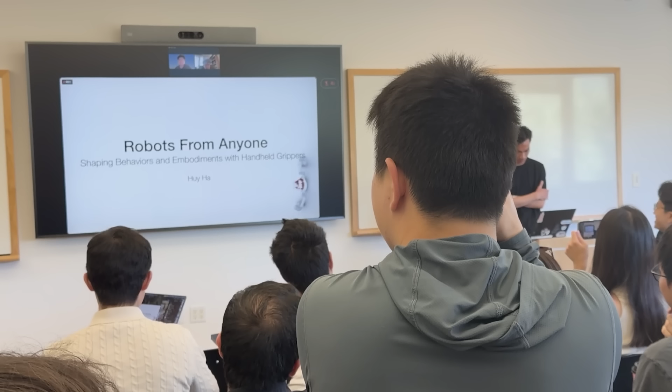Before we start, I just want to say a few things about Huy. So first, I want to talk a little bit about his research. So you can say that Huy always works on things before they get cool, but you can also say that Huy's work is what makes something cool and starts the trend. So for example, he worked on Flingbot before cloth manipulation became a required demo for all the startups. And then he also started working on language-informed robot learning before large language models were popular.

And then recently, he has started working on learning for robot hardware design, and I think we should all pay attention to that. I think whenever Huy is starting something new, we should pay attention to it because that's very likely to be a new trend.

Okay, and then also a little bit about Huy as a person, as a lab member. I think as one of the earliest lab members, Huy really helped to set up the culture in the lab. And many of the young students probably know Huy as the person sitting next to the door, the first person that will greet you when you get into the lab, the person who tells you all the lab policies and rules, and also the person demonstrating how to break them.

And I think most importantly, Huy is always the first person that people come to for help when they need anything, either technical difficulties or personal struggles, or just helping you take your best passport photos. Huy is always there, and we're always very grateful to Huy for setting up the very nice lab culture, and I'm sure the lab will feel different when you graduate successfully. But we'll try our best to carry over the culture. And yes, I guess with that, you can start your thesis defense.

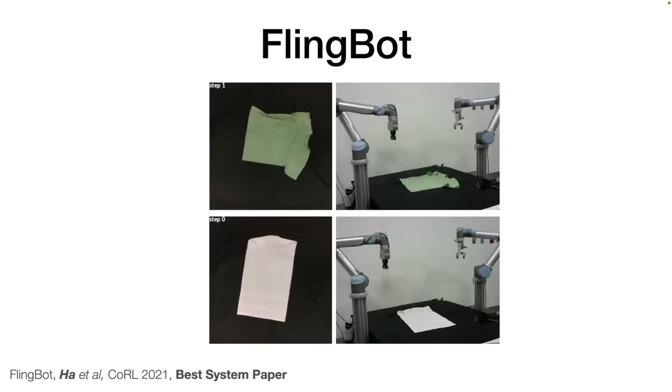Today, I want to start by telling you about everything that I've been doing in the last few years. And I'll start maybe a year before my PhD, when I was an undergrad in Shuran's lab, working on a system called Flingbot. So Flingbot unfolded cloth using dynamic flinging actions with all these nice tricks for self-supervised learning, safe action parameterization, and sim-to-real transfer. Normally, I tell you about how great Flingbot is, but today I want to dunk on it. Not on Flingbot itself, but the entire way of building robots that it represents. See, it's a perfect example of how robots have traditionally been built.

Here, some roboticist picks a task they care about, say, unfolding cloth, but before a single cloth gets unfolded, they have to solve two hard problems. First, the embodiment. What is the best robot for this task? What gripper, what fingers, how big the arms are, how the whole workspace is laid out. And second is the behavior. Once you've committed to a robot, how do you teach the task? What data, what learning signal? Each of these decisions requires a lot of expertise, or in my case, as an undergrad, a lot of trial and error. And here's my problem with it.

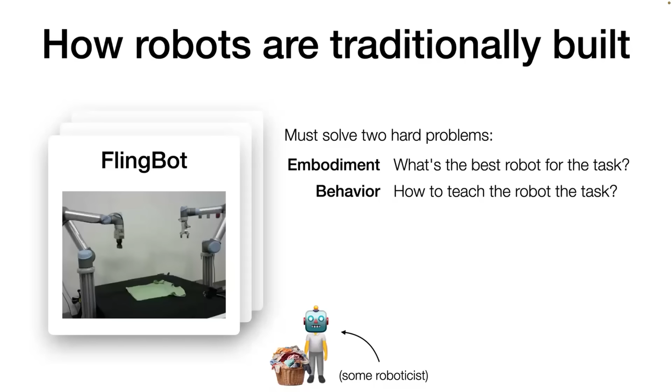One expert does all this work, and what they get out is just one task and one robot in usually one room. And after Flingbot, I became convinced that this just won't scale. There just are not enough experts to cover every task, every robot, in every place that we want robots. And what's actually missing here is data from enough tasks in enough situations, and there's just no way to get that from just a handful of roboticists.

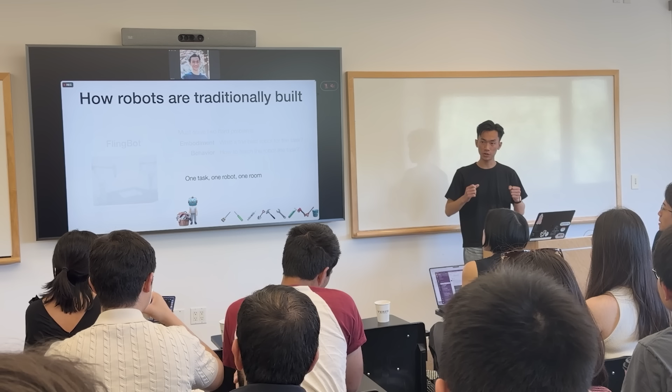So here is my thesis. To get any task on any robot running anywhere, we need to open up robotics to everyone. If we make it easy for anyone to contribute, not just experts, two things happen at once. First, we unlock a whole new level of scale and diversity for real-world robot data, critical for robust and capable robot policies. And second, people become empowered to shape the future of robotics.

And this is because robots that come from this move the way that people do, doing tasks that people care about. And these robots would quite literally be shaped by everyone's hands and therefore reflect the people behind them. And that's what I mean by robots from anyone.

And for that, the two hard problems have to open up to everyone. First, people need to be able to teach robots new behaviors so intuitively that no expertise is required. That's how we reach towards any task anywhere. And that's the first half of today's talk.

And second, people need to also be able to shape the robot's embodiment without being experts either. And this is where we really push the meaning of any robot, to even include robots that don't exist yet. And this will be the second half of the talk.

Remarkably, the same simple thing turns out to be the key to opening up both of these problems: a handheld gripper. And let me explain by talking about a project called UMI.

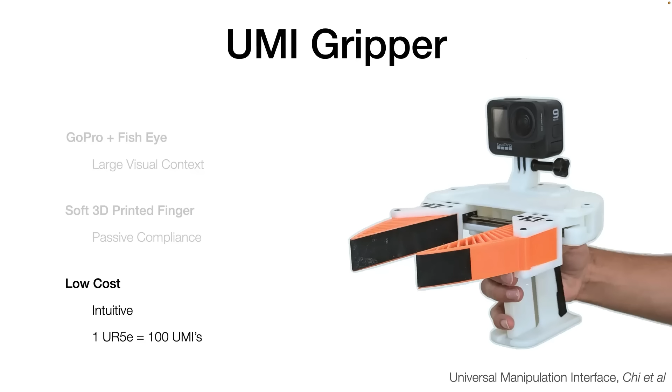For robot observations, UMI has a GoPro with a fisheye adapter that gives a large visual context. For robot actions, UMI has soft 3D printed fingers, which gives passive compliance and helps increase manipulation robustness. And the system is low cost. Since it's so intuitive to use, you can just give it to anyone and they can start using it. And further, for the price of one UR5e, we can build 100 UMIs.

And then using UMI, each entire robot demonstration will be contained in a single MP4 file. And then from that file, we can run visual inertial odometry from the RGB and IMU information to give 6-degree of freedom gripper movements. We can also call our tag tracking functions from the video frames to get gripper commands. So from one MP4 file, we get robot observations and then robot actions.

And from that data, we can train a policy that takes as input images and proprioception information to produce future gripper movements. So the entire pipeline will look like this. We'll collect a few hundred demonstrations with UMI, all without the robot, as you can see on the left, and then we'll train a diffusion policy and then deploy it on the right. And this pipeline will work even for dynamic tasks like tossing.

But there's one caveat. See, the gripper movements require a precise position controller, one capable of tracking robustly even under fast trajectories. And such precise position controllers can be engineered for fixed-base arms, like the UR5. But what about legged robots?

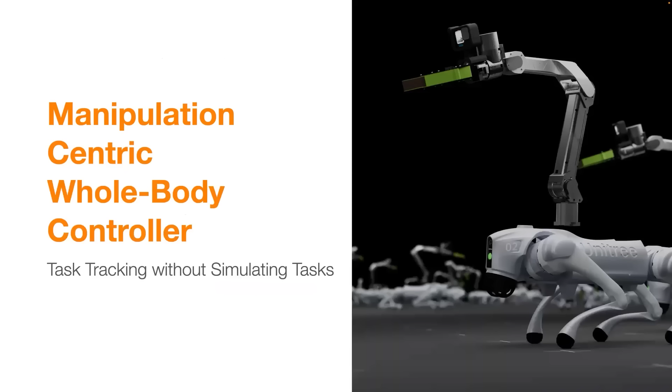So that's where the second part comes in, where we train a manipulation-centric whole-body controller for task tracking without simulating any tasks. So what does this thing do? Well, it should take as input end effector target poses, and then output robot-specific body commands in order to reach those end effector poses. So in the case of my quadruped system, it should output 18 scalars, 3 for each leg, and then 6 for the arm.

And so if this is the interface to our whole body controller, you'll notice that it slots right in place into our UMI pipeline to act as the position controller that we need. So what do we actually want out of this whole body controller? Well, to start, the controller should have a formulation that is compatible with UMI, in that it should not depend on any robot-specific body commands like velocity commands, taking as input only end effector targets.

They should also track precisely, even for dynamic targets, just like the engineered controllers for fixed-base arms. And then lastly, they should be stable, in that the end effector should be stable regardless of the body movements. This means that the controller should try its best to isolate these body movements from the gripper movements. And the quadruped field actually has a term for this kind of stability. They call it chicken head stability for pretty obvious reasons. So for the rest of the talk, when I say stability, this is what I mean, chicken head stability.

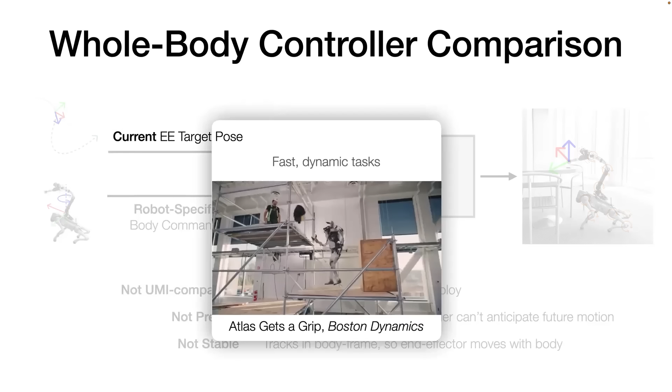So what do prior works do? Well, they typically share the 3 following design choices. First, they take as input robot-specific body commands, like the velocity body command, so that's not UMI compatible. Next, the prior works represent the target as a single target pose, which might work for slow quasi-static tasks, like the ones that prior works have shown. But this is not enough for dynamic tasks, because in order to execute dynamic tasks, legged robots take time to build up the right momentum, just like humans do.

So, for instance, in this Boston Dynamics video, notice how Atlas needs to bend down and coil a little bit to the left before tossing to the right. And intuitively, the controller just needs a preview of what motion is coming up in the near future to have this kind of anticipatory behavior. So we might be able to address this by giving it more than just a current target, maybe a trajectory of target poses.

And then lastly, the prior works' controllers aren't stable. First, they track in the body frame. So this means that the end effector will follow body movements. But since the arms have long links, they typically act to amplify tiny shakes in the body. So notice how with each little step here, a little shake in the body causes a large shake in the arm. But instead, what we want is world frame tracking, controllers that compensate body movements.

To really drive this point home of why this is important for policy deployment, let's walk through an example. Imagine that the robot is trying to put the cup down into the saucer, but it's being pulled backwards. What a body frame controller would do is to try to keep its target constant in the body frame. So as the body's pulled back, the end effector follows. This means that the controller will now depend on the much lower rate reacting manipulation policy to perform this correction.

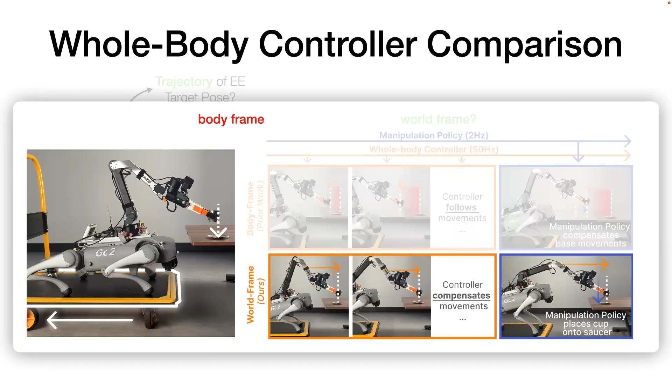Meanwhile, a world frame controller would keep its target constant in the world frame. The gripper stays while the body moves. It would compensate the body movement. So we might want to rethink this body frame formulation.

In addition, they only track slow trajectories, which are much easier than fast ones. So this means the controller doesn't really need to learn the necessary body coordination skills to achieve high velocity motion. And then asking it to perform these kind of motions at test time would be out of distribution and then lead to dangerous states. And it turns out that this whole body controller formulation is shared across most prior works. As you can see here, a system from CMU, one from UCSD, and one from MIT.

And so to address these, we took out robot-specific body commands, making it UMI compatible. We got predictability by giving the controller a trajectory of targets as input, allowing it to anticipate future motion. And then finally, instead of training on slow trajectories in the body frame, we train it with manipulation trajectories recorded from UMI in the world frame, which could include some fast motions like tossing that are task relevant. And what we get out is a manipulation-centric whole body controller.

So together, the pipeline looks like this. We'll have images coming into the visuomotor policy, which outputs end effector movements. This part is trained using behavior cloning on real-world data. And then the end effector trajectories are then fed into the whole body controller, which is trained using reinforcement learning entirely in simulation. So remember the goal of getting any task, any robot, anywhere? Let's see how the UMI on Legs pipeline takes us closer towards this vision.

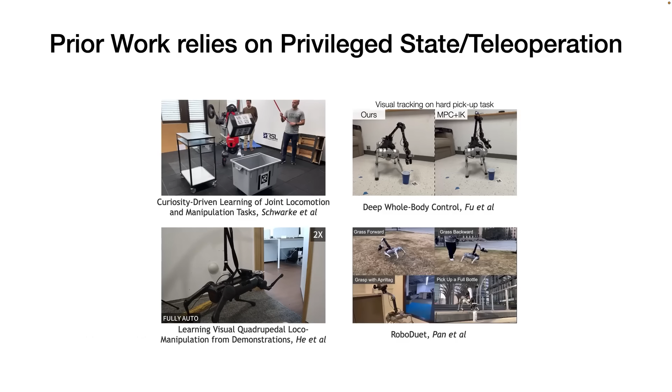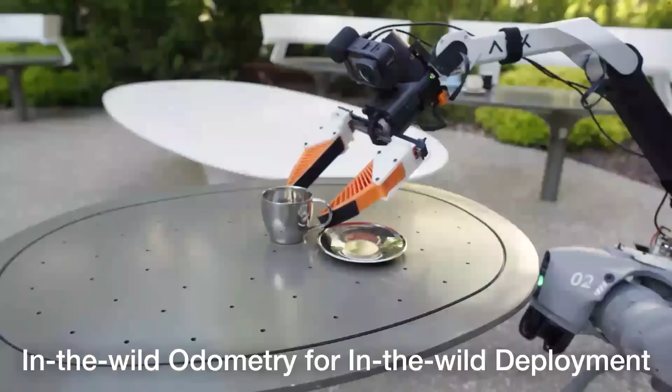However, when we looked at existing systems, we found that many of them used privileged states in the form of ArUco tags. And most outdoor manipulation examples are actually not fully autonomous. So to our surprise, it seems like the lack of in-the-wild real-time odometry has ironically constrained many legged systems in the lab. In contrast, here is the UMI on Legs system. No wires, no ArUco tags, running at 1x speed out in the wild, fully autonomous, doing its cup rearrangement task.

So how do we do it? Well, we use an iPhone mounted to the butt of the dog, and then we implemented a custom iOS app that publishes the iPhone's pose to the robot at 60 hertz. And because it's tuned very well by Apple, it runs real time and works anywhere. So with this last missing component, we finally get stabilization. Whether it's moving back and forth, side to side, up and down, it just stabilizes.

We design experiments to evaluate the capability, robustness, and UMI compatibility of our formulation. Diving into the first one, we ask, is our system capable of really hard skills? Can it do more than just pick and place? So what's a really hard skill? Here is a really hard skill, tossing. It is so challenging that it's only been done once before on quadrupeds by Boston Dynamics.

So how did Boston Dynamics pull this off? Well, they typically use offline trajectory optimization in order to find a tossing motion that could toss as far away as possible. And by all means, this is really hard. Getting any tossing behavior in quadrupeds is really hard, but let me compare this to our setting.

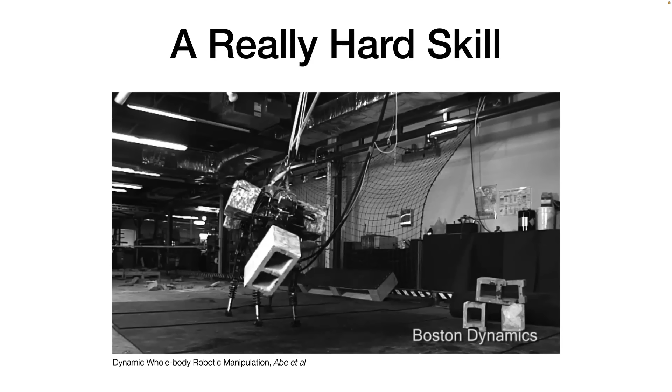See, first, our setting is more unstructured. We have to track unseen trajectories coming from a diffusion policy with no explicit assumptions on the object model. So our controller has to track online instead of pre-computing some trajectory offline for known objects. And second, our task has a narrower set of goal states, since we're not just trying to toss as far away as possible, but instead towards a specific target.

So we'll go ahead with tossing. We'll collect some demonstrations using UMI in the real world, and then we'll use those trajectories to train our whole body controller in simulation. Okay, it works in simulation. What could possibly go wrong in the real world? Sometimes I still ask myself the same question as I look through weeks and weeks of sim-to-real debugging footage, because whatever we did, the robot would just shake.

And this video here is my favorite because not only can you hear the violent vibration when sim-to-real is incorrect, but you'll also be able to see that my lab-mate Zilly is just doing her thing in the back. This goes to show how normal this is during our sim-to-real stage. It's just, oh, it's a violent vibration. And one of the reasons why it took so long was because we found it so hard to diagnose the issue. Whatever went wrong, the robot would just shake. Debugging this took us quite a while.

But let me show you what reducing the sim-to-real gap looks like so that next time you can reply to your advisor something more intelligent than saying it's just shaking. So you can tell her, oh, it's because of the pose estimation latency of the odometry. So you do a slow motion smack test to see exactly what that latency is. After we did this, we simulated pose latency during training. Or you can say, oh, it's the joint frictions, they're wrong. So you flip the dog upside down to do some system identification.

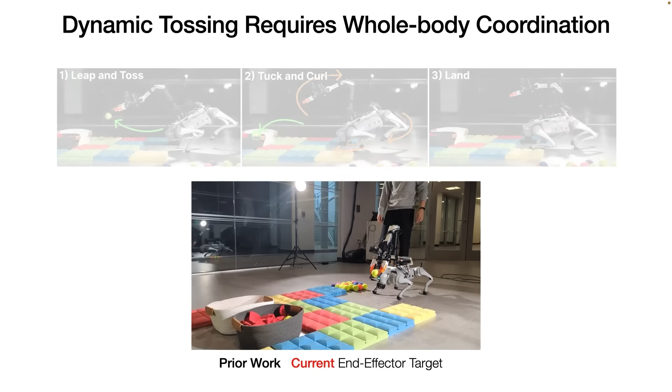The strategy here is a leap and a toss, and then a curl and a land. The upshot here is this: using a trajectory interface like we do allows the whole body controller to anticipate future motion and track more precisely and safely, even for dynamic trajectories. So is our system capable of really hard skills? Thanks to our whole body controller design and sim-to-real efforts, I think so.

Moving on to robustness, we wanted to see if our whole body controller can handle unexpected external perturbations. So we've designed this pushing task to test robustness, because our controller was trained in simulation with no objects ever resisting its motion. But to help bridge this gap, we've included domain randomization on mass and center of mass along the body, as well as along the arm and the gripper. It turns out that this was enough to get this task to run.

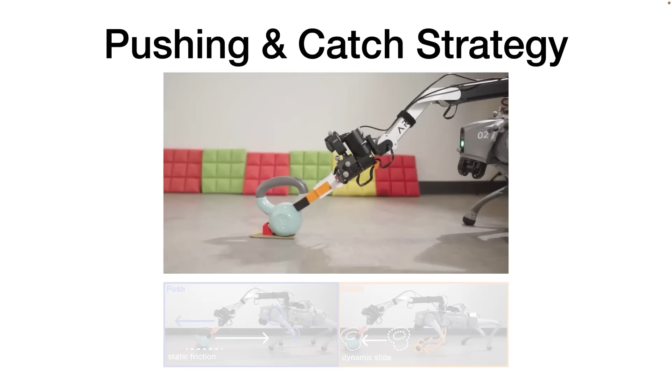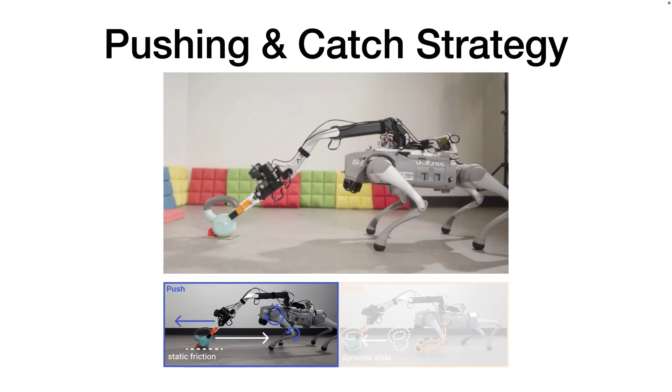What the policy has learned to perform this task is a strategy I call push and catch. So in the pushing phase, this robot will try and build up more and more power in its body as it fights the static friction of the weight on the ground. So it will keep pushing until this power builds up and the static friction breaks into a dynamic slide, at which point the robot will catch itself. And then this strategy will repeat until the robot pushes the kettlebell towards the goal.

Quantitatively, we saw a 90% success rate for fully autonomous pushing. And when we tried the 20-pound kettlebell, we noticed that the hardware experiences shutdowns frequently due to overheating and overcurrent. So we switched to a tethered setup with external power, and then we managed to run 5 trials. The external power is all these noodles that you see in the back. So can our controller handle unexpected external perturbations? Yeah, I think so, thanks to domain randomization, but we probably need better robots with better batteries.

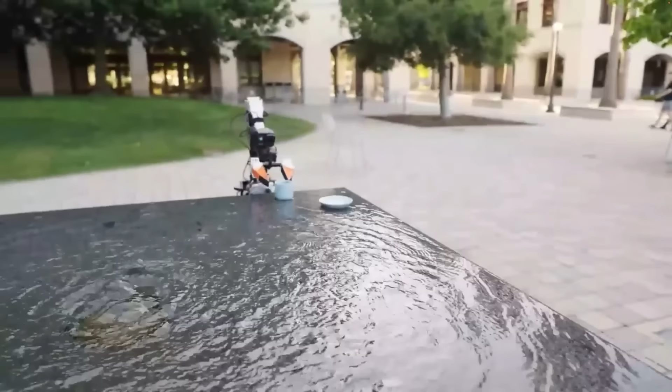And finally, my favorite experiment, UMI compatibility, where we ask: can we plug and play existing UMI policies onto UMI on Legs? So for this cup rearrangement task, we're supposed to push the cup to rotate it and then put the cup down onto the saucer. And we took this publicly available checkpoint from the UMI repo, developed entirely separately from our quadruped platform. We put it on our quadruped, and this is what we got. We put our system on a water fountain it's never seen before on campus, on a shaky collapsible table, and then asked it to perform this cup rearrangement task out in the wild, all unseen.

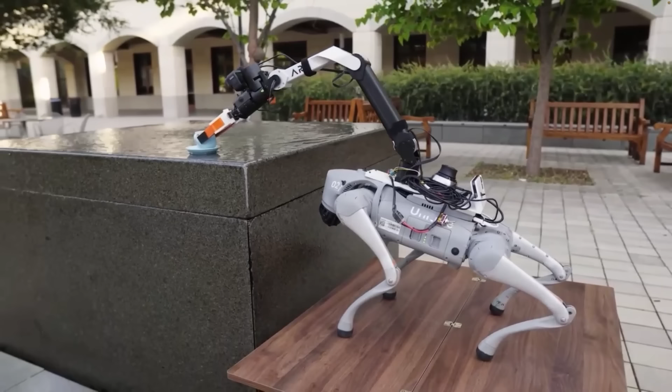We evaluated the system on 4 different cups in 5 different locations on campus and reported a 60% success rate. And comparing this in-the-wild evaluation with an in-lab evaluation, we noticed a 20% gap. We also compared our iPhone-based odometry with the Oracle odometry and saw that there was another 5% gap between the iPhone-based odometry and the Oracle motion capture-based odometry. But you'll notice that even without perfectly stable odometry, our controller remains pretty stable, as you can see here in how it reacts to perturbations during deployment.

So this is the entire pipeline running, UMI outputting actions, and then the controller tracking it. And as it's running, you can come along and just pick up the robot. You can really mess with it, push its leg, come along, smack the gripper, and it will stay stable. Chicken head stable.

But if you're going to remember one thing from UMI on Legs, I hope it's that we can do this at all. Before UMI on Legs, nobody has ever been able to reuse the same policy for a fixed-base arm on a quadruped and then run it anywhere. And this is the first step towards any task, any robot, anywhere. We're doing some really hard tasks, ones that are really finicky to teleoperate a robot for, and we're using the same policy on unseen robots in unseen environments. That said, that's just the first step, and we've still got some ways to go.

Notice here how the exact same UMI checkpoint has different performance between different embodiments. When we dug into it further, we verified it in simulation too. Sadly, not all embodiments are equally UMI-able. For instance, we saw that fixed-base arms like the UR10e closely match the performance of an Oracle embodiment, but the performance is much worse for aerial drones.

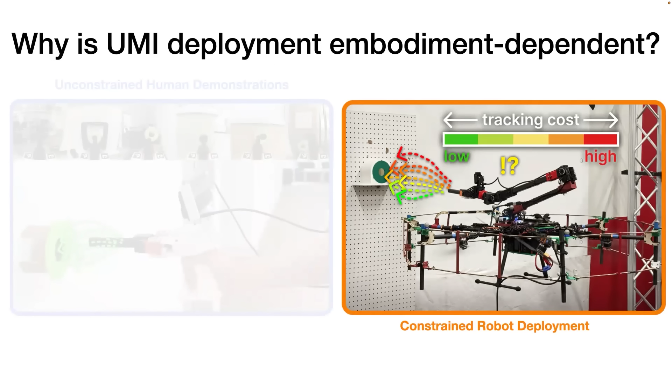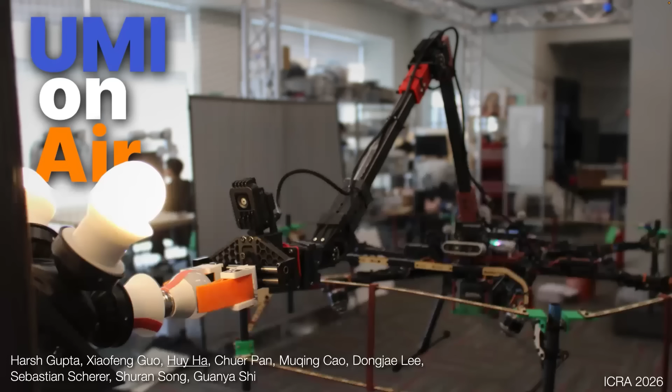So we asked, what if we guided the policy to output actions that are easier to track for a given embodiment? Let me tell you how we implemented this guidance in a project called UMI on Air. So like before, we're going to take in our observations along with noisy actions to iteratively generate the denoised actions. The actions are then tracked by an embodiment-specific controller. Notice, though, that the controllers usually give a tracking cost, which tells you how well the trajectory can be tracked.

You can take the gradient of this cost with respect to the action and then incorporate them into the diffusion process using diffusion guidance. Essentially, the gradient is asking, how could the trajectory be changed to give a lower tracking cost? And then nudge the diffusion samples towards those better trajectories. And this will work for different controllers too. You can just swap out different controllers and embodiments, and then you reuse the same policy.

And we call this method embodiment-aware diffusion. This is because even though the UMI policy remains embodiment agnostic, its deployment is now embodiment aware. Because UMI on Legs only supported one-way communication from the policy to the controller. UMI on Air closes this loop with two-way communication using diffusion guidance. And in doing so, it makes all embodiments more UMI-able.

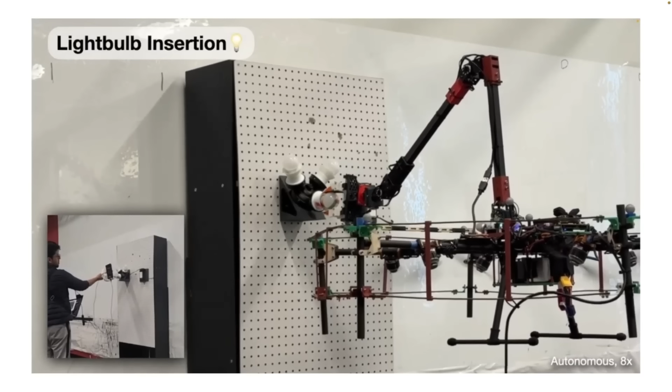But what I really want you to remember from this project is how it enabled collaboration. Because if we only make it easier for anyone to collect their data, we'll have many, many small datasets. However, if we make it easier for anyone to collaborate with anyone else, we'll all have one shared dataset and we can build a community around it. Let me illustrate. In UMI on Air, our Stanford and CMU team can collaborate from across the country without ever seeing each other. In fact, I just met the first author yesterday.

For the light bulb insertion task, I actually collected all the UMI data here at Stanford. I just spent some time in an afternoon walking around Stanford to collect this data. And then that policy was directly deployed on a drone at CMU in Pittsburgh. The best part is, I still have never seen the robot. I don't even know if I ever will, but maybe that's the point.

The magic of the UMI approach is that people can collaborate and contribute. Doesn't matter what skills you have, where you are, whether you even have a robot or not. UMI makes robotics more accessible to everyone. And I think that's why UMI is taking off. To further facilitate collaborations beyond our own lab, I started this initiative called UMI Data, aimed to include all UMI-like datasets. And I've been truly blown away by how many people all around the world have embraced UMI.

In 12 months alone, the UMI community dataset has grown by 900,000 demonstrations. For comparison, in the same time frame, the DROID dataset has grown by 0 demos. This stark contrast reveals a core insight. It's that UMI datasets are not static artifacts. They are as dynamic and lively as the community that supports it.

So let me take a step back. For the two hard problems that we started with, behaviors and embodiments, the first half of the talk has been about the first one, behavior. The handheld gripper that made teaching robots so intuitive that anyone can collect robot data out in the wild. No robot, no expertise required.

We've deployed the resulting UMI policies on legs, on air, and even underwater. This is our policy controlling this drone out in the ocean, a completely unseen environment. And although we can't dive into UMI underwater today, I hope it further convinces you that we've made real progress towards behaviors for any tasks that run on any robot anywhere.

However, as we've seen, running on any robot doesn't mean performing optimally on any robot. With embodiment guidance, we've narrowed the gap, but there will always be some difference in performance between different embodiments. Because you can keep trying to make robots smarter with bigger data sets, better algorithms, or more capable policy architectures, but if you think about it, it's the robot's embodiment that enables or constrains what tasks the robot can perform well. For instance, you can collect as much tossing data as you want, but if your robot's embodiment is far from optimal, well, it might toss itself too.

So this brings us to the second half of today's talk. Here, we also need to open up the second hard problem to everyone. We want to make sure that anyone could generate robot embodiments for tasks that they care about without being experts. So let's frame this problem more concretely. Given as input a target end effector motion from some task demonstration and some reward function, our goal is to generate complete robot embodiments for the task that achieve high reward. And here by complete, I mean everything including geometry, kinematics, inertial properties, as well as how it moves with a controller. We call this problem motion-conditioned robot co-design.

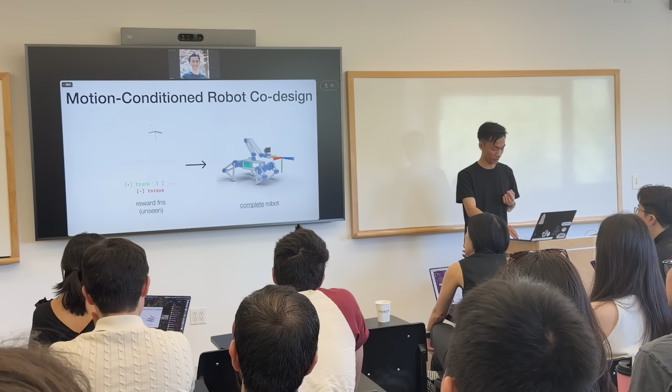And for the second half of today's talk, I want to tell you about our attempt at tackling this problem in one unified framework called transformer-transformer. It has 3 parts, and you have until part 2 to figure out the pun in the name yourself. So with that, let's dive into part 1, a unified robot representation. Now, if we want a model to co-design any robot, the network needs a common language that spans across diverse robots' embodiments. So we create robot tokens, a unified robot representation. We call it unified because we've designed it to tokenize any robot, giving tokens that can be used as inputs or outputs from the model.

So given a robot like this quadruped manipulator, we parse all of its embodiment attributes into a few token types, including links, joints, and motors. We also include the robot state from the motor, links, joints, as well as the actions. So we have robot embodiment tokens and then robot dynamic tokens. This means that robot token is complete. It includes all the information about a robot's embodiments and dynamics. Robot token is also flexible. It can handle arbitrary degrees of freedom and connectivity using token IDs. Here, the tokens use IDs to point to each other so that joints, for instance, know which two links they connect.

And then robot token is also consistent. The tokenizer does a lot of pre-processing to reduce all this redundancy by storing inertial and transform data in a consistent frame. And the upshot of all this is that our tokenizer can turn any robot into a sequence of embodiment and dynamic tokens, whether it's a biped with complex linkages, a dexterous hand, or even a full-blown humanoid. Now the question is, what can we do with these tokens?

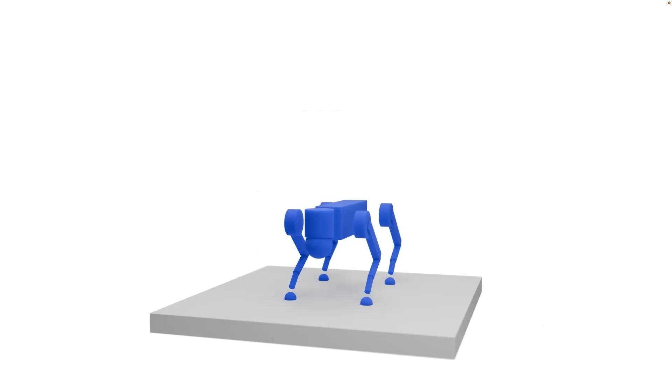And since this whole process is stochastic, if you run it again, you'll get different robots each time. If you train on different robots, here we tried training on different robots from MuJoCo Menagerie, and then found that in a single transformer, you can diffuse out diverse robots, from fixed-base arms to quadrupeds to humanoids to dexterous hands. I bet you never saw a diffusion process on robots before, right?

Our model can also wear other hats. It's also a cross-embodiment controller. It takes as input the target trajectory and the current robot states to diffuse out robot actions. We call this control policy embodiment aware because it is given the complete embodiment information. This means that when you run the policy on a robot with, say, different inertia, a smaller joint range, or different motor gains, the policy will be able to adjust its control strategy accordingly because it is conditioned on the complete robot embodiment.

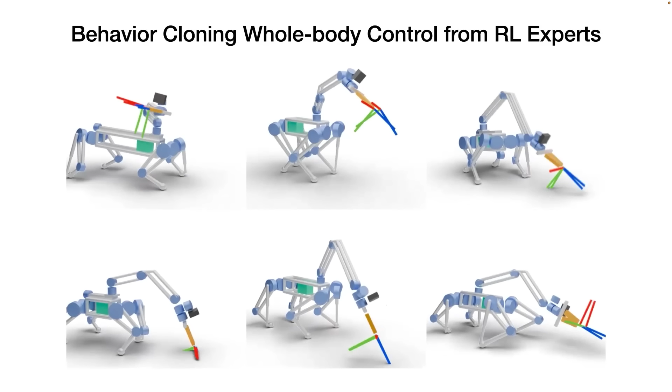And this is why when you run it on different quadrupeds with different knee directions or different torso length, it will just adjust its control strategy accordingly. So with all of these different functionalities under one model, we can now go back to the first question and ask, what is the best robot embodiment for a given manipulation task? Another way of phrasing this question is, conditioned on the manipulation task, could we generate robot embodiments that achieve high reward?

This brings us to the third part of transformer-transformer, dynamics self-guidance, a unified dynamics training objective. And here we call the training objective unified because it prepares the model to zero-shot optimize unseen rewards at inference time. Let's see how. Given as input a target motion trajectory and some reward function to optimize, the model must output an optimized embodiment. The key challenge here is how can we generate high reward embodiments, especially since our model was never trained on any rewards.

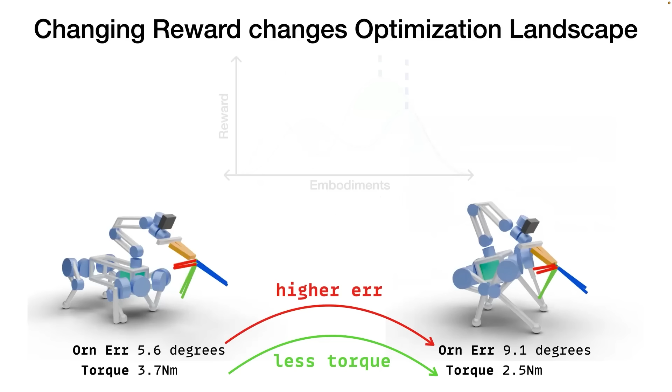And for the same trajectory, we can also ask the model to optimize more reward terms, such as also minimizing the torque. And this made the robot smaller and therefore lighter, while still being able to do the task. Adding this extra term reduced the average torque usage by 32%. See, by adding another reward term, we're changing the optimization landscape. This also changed the best robot for the task, because now the model must balance between these two trade-offs, sacrificing maybe a little bit of tracking performance to use a little bit less torque.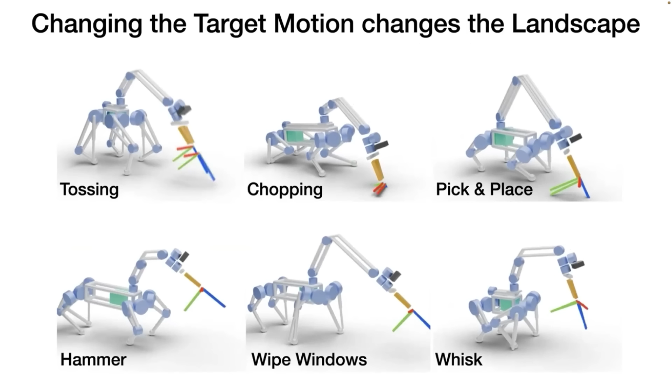And the model is able to make this trade-off, demonstrating that you're able to train on embodiment dynamics modeling to optimize for unseen rewards. In other words, the model can zero-shot optimize rewards. So changing the reward changes the landscape. But changing out the target motion also changes the landscape. Here, when we conditioned on different trajectories, we indeed see that the model produces different robots, each specialized for the single motion that it was conditioned on. But wait, let's take a step back. We actually don't want to optimize robots for just one motion.

We actually want to optimize the robots for manipulation tasks that are much better captured by a distribution of motions. So how could we do this? And it turns out that we can directly tackle this by composing diffusion models. At the high level, if we have one model optimizing for tossing and another optimizing for chopping, we could get a model optimized for both tossing and chopping by adding the diffusion predictions together.

So to test this, we took the bimanual dishwashing UMI dataset and fed 26 validation trajectories into Transformer. The model then generates robots that are optimized for all the trajectories that we gave it, helping us navigate the large design space of both discrete choices like different spine designs, as well as continuous choices like arm dimensions.

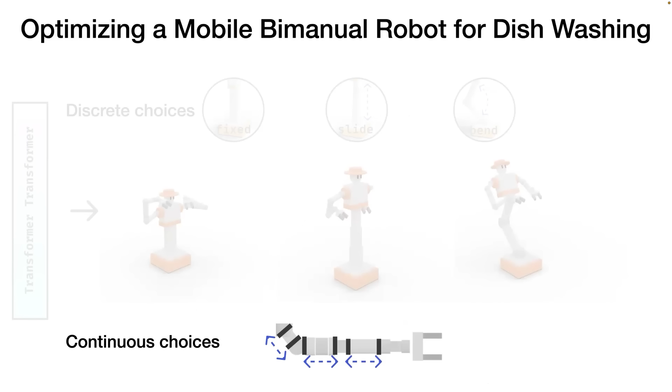And after generation, the same model can be used as the cross-embodiment controller used to validate the generated robots. So essentially, a dataset of manipulation trajectories coming in, complete robot embodiments and actions out. This demonstrates that we can zero-shot optimize for a manipulation dataset with multi-trajectory optimization.

Moving on to some quantitative results. Here's the random baseline, which of course does really poorly. We also have a CMA-ES baseline in orange. This is an evolutionary baseline. So as we give it more compute, of course, it performs better. Now here's Transformer in blue. You'll notice how you get even better performance than CMA-ES while taking much less time. Even when our model uses 128 samples, it finishes in less than a second.

So why is our formulation so much faster? There are two reasons. The first reason has to do with using GPUs instead of CPUs, which can efficiently parallelize over the number of samples. But the second has to do with our network architecture. So typically, dynamics models, including analytical dynamics models, are sequential models, predicting one step at a time. In contrast, we have a diffusion architecture that is non-autoregressive along the time dimension. So performance along an entire episode is evaluated in parallel as opposed to sequentially.

Now up next, using dynamics guidance. In green, we found that using this gradient information was useful to squeeze out a little bit of extra performance. However, using dynamics guidance also means that the model now must perform both the forward and the backward passes. And although this doubles the optimization wall clock time, we still found that it was 4 to 16 times faster than CMA-ES.

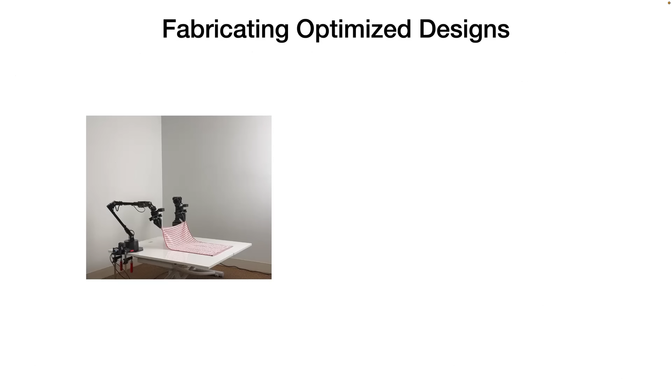Finally, we want to stress test the system to see if its optimized designs can be fabricated with real hardware. Remember the cloth unfolding task that I opened the talk with? Here it is again. We'll use it for our real-world experiments. The task here is not just challenging because it involves dynamic high-velocity flings, but also because it demands robustness to mismatched physics, from cloth friction to aerodynamic drag.

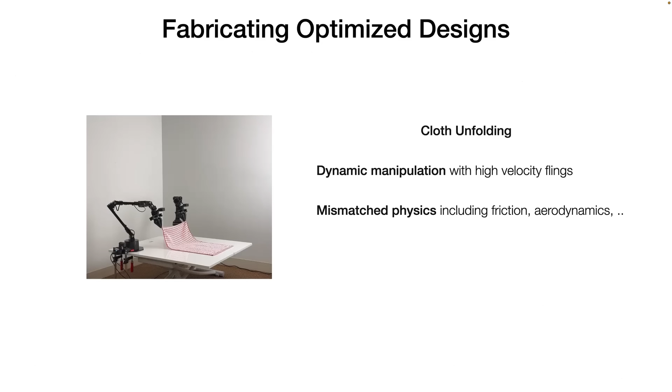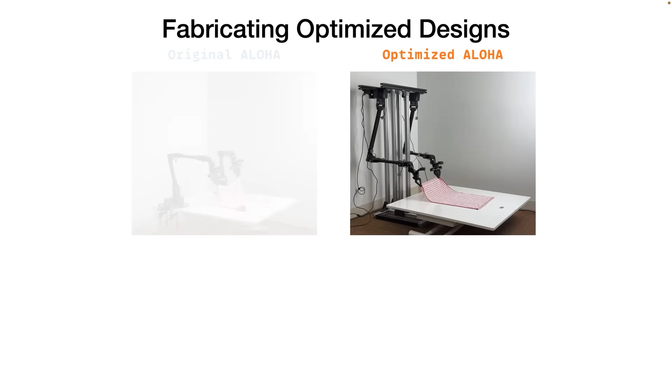And when we tested this task with the original ALOHA design, we found that even with a lot of effort, it struggled to track this trajectory. In contrast, when we asked Transformer to optimize the design, it came up with this design. Notice how the arm's link length is actually longer than the original. It's long enough to kinematically reach all the targets along the flinging motion, but still lightweight enough to be supported by the small motors on the arm.

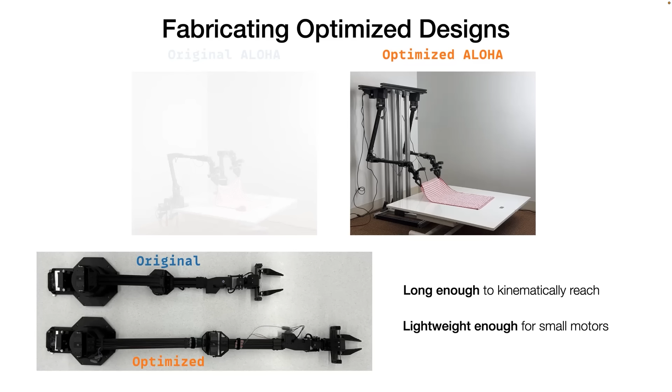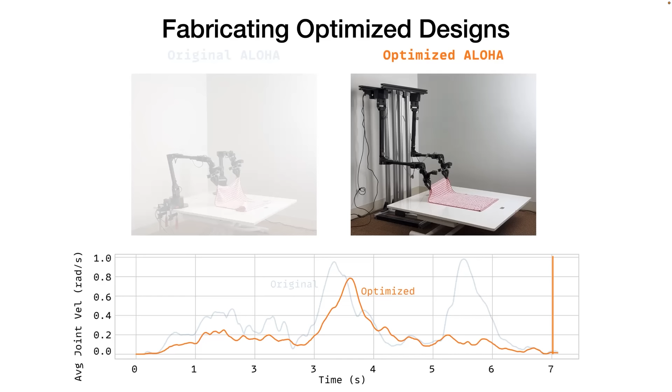It also mounted the arm upside down, which enabled this more energy-efficient underarm swing as opposed to an overhead fling. These design choices enabled good tracking over the entire trajectory, leading to a fully unfolded cloth at the end. And quantitatively, we saw a 73% reduction in tracking position error, along with a 30% reduction in maximum joint speed. These results demonstrate that our optimized designs are manufacturable and their gains robustly transfer to real hardware.

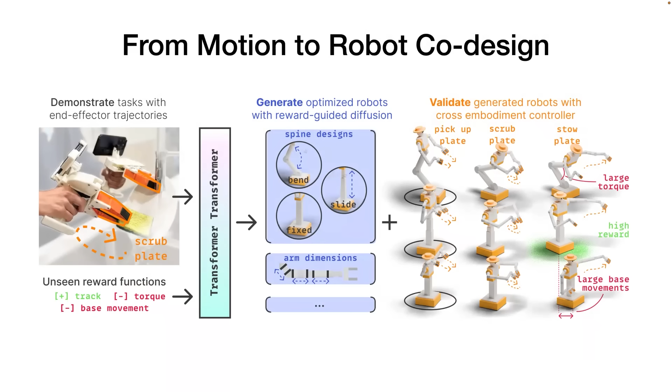So altogether, Transformer rethinks robot co-design for manipulation as a 3-part process. It starts with demonstrations of how the end effector should move. Then these motions are optimized by our model to maximize the reward, and it will explore a large design space with reward-guided diffusion. This process generates complete robots, which it can then self-validate by directly controlling them.

This model handles all these low-level technical details in the robot hardware and control so that people can just give it motions for any task that they care about. This is how we take a step closer to anyone being able to generate robot embodiments for tasks that they care about.

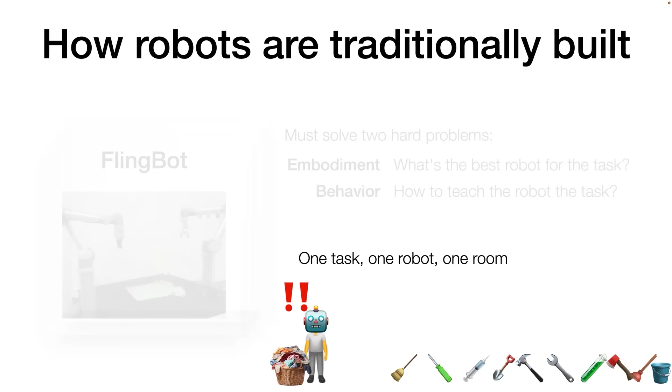So we started off with a way of building robots that yielded one robot in one task in one room. Today, I've argued for this to scale to any task, any robot running anywhere, we'd need to open up robotics to everyone, because that allows us to achieve scale and diversity in real-world robot data. This is the perspective that my research has brought me to, but actually not where I started.

Because when you ask how should we scale robot data, maybe one of the first thoughts is, oh, the robot should just collect data by itself. This was the pathway that I explored when I first started in this field. And the thing that didn't scale here is that the system remains pretty task-specific, from their action parameterization to their task reward design. So I looked for another way.

Another way to scale robot data is to make use of all the existing internet data, like images and text. And this led me to investigate robots that learn from foundation models. And although these models were really good at generalization in images and text space, they just couldn't handle low-level robot actions by themselves. This brought me finally to the UMI line of work for learning from human demonstrations. And as of now, I think there's a lot of progress being made in this third pathway.

But looking forward, I actually think that the technical pathway for robotics may trace back my own path, but in reverse order. Learning from human demonstrations seems necessary for learning the low-level robot actions. But to perform higher-level reasoning and coordination, we might need to merge them with foundation models somehow. And this takes us towards robots that can act autonomously by themselves for longer and longer, towards a point where they start collecting more data by themselves than what we put in.

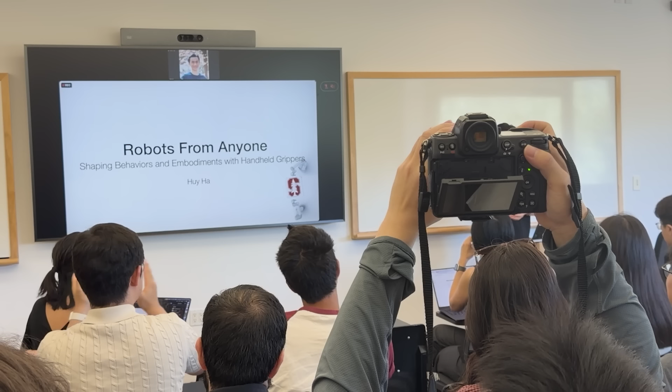Before I open up for questions, though, I think it's customary to do the acknowledgement sections. Now, after the questions, you want to... Maybe I can do it now? Okay. Yeah. The chair is Yunju. Yes. Thank you. Okay. No, he is a Columbia student. So that's why Yunju is... Thank you, Yunju. We'll go on to the acknowledgements.

So I want to start by thanking all of my collaborators. I've learned so much from working with all of you, and I hope you all had as much fun working with me as I did with all of you. And a special shout out to my mentees, who I'm so proud of. Each and every one of them has continued to do research in AI and robotics after working with me, and I can't wait to see what you all go on to do. And of all the people that I've worked with during my PhD, though, there's one who matters the most, someone who deserves her own slide.

In 2019, I became interested in robotics and AI. So after taking Shuran's course, I decided that I really wanted to do research in her lab. So I wrote her a few sentences asking her. Over the last 7 years, I've been fortunate to be mentored by one of the most brilliant, creative, kind, optimistic people I've ever met. I've got to see her blossom in her professorship, mentor and graduate her first PhD students, and grow her lab from Columbia to Stanford, from my undergrad all the way through my PhD.

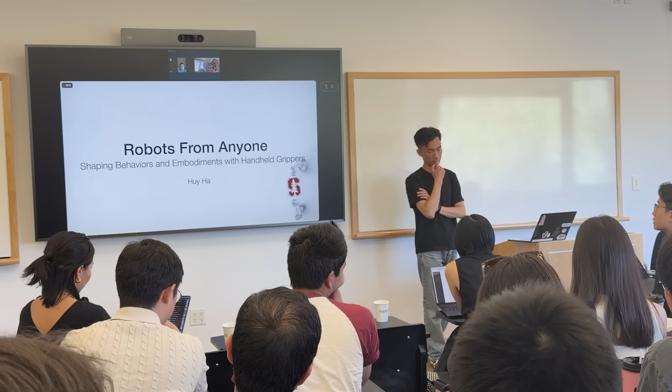And then for the second project, when you were using the task cost to produce a gradient to improve upon your trajectory, does that mean you rolled the diffusion out a little bit, or you predicted x0 and then you had a tracker, like in simulation, track that, produce a cost, update it, and then go back and forth like that? And then after that, you track the entire thing, or was that done blind? Yeah, great question. Everything is done in the network.

This is one of the reasons why it ran so fast, because everything from its internal controller policy to the embodiment diffusion process to the dynamics part, it's all happening as a diffusion process. And that's why it runs on the GPU without ever being bottlenecked by any CPU-GPU communication. And this is also one of the reasons why CMA-ES is so slow. It has to have the simulation in the loop. It has to run it sequentially, whereas ours just diffuses out. Yep.

One question on this. Yes. You can help me.

What was it, me? Okay. Hello. Thanks for the great presentation.

One question I had was, it seems like a really big concept that you've introduced a lot is having end effector poses or trajectory as what the main high-level, low-level policy interface would look like. Do you think that is optimal, or do you think there could be something better?

Yeah, this is a great question because it gets at one of the key trade-offs that my work makes. Manipulation, I would say that at the most grounded level, it's applying the right forces onto objects around the world. Poses is just not forces. And I think that a much more complete kind of interface would also include some measurement of force or tactile.

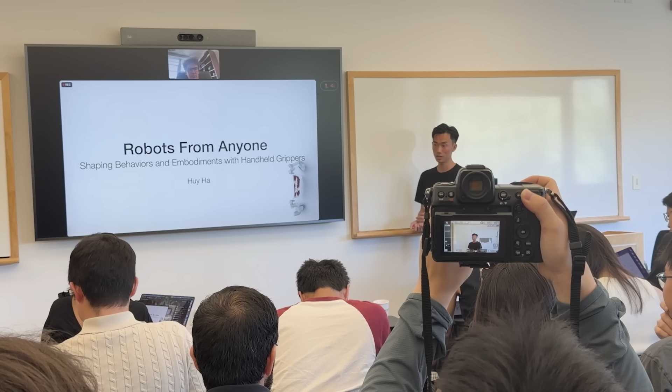But I think that if you train it with enough diverse terrain, it could work. It could close the gap significantly. So the end effector trajectory the policy produces is around the same. Yes. That's the control gap that you saw.

Yuhai? Yeah, I really had a great time working with you on UMI on Legs. I learned a lot, not only about your technical skills, but more about your passion toward research and your resilience through all the failures we had together.

So actually, I have a follow-up question. Nowadays, coding agents and reasoning models are so good. Maybe they can already solve most of the bugs we have, like the transform bug and those very classical issues. But I'm curious, what do you think is the most important property nowadays to become a good robotics researcher or engineer in this context?

Yeah, that's a really hard question that a lot of people are actively thinking about right now. The common answer I've heard is that these AI models are so capable, they're going to keep doing more and more of what you do. So it's not about what you do. Some people have started to say maybe your goal as a researcher or student is to teach yourself, to learn, to understand, and that will never go away.